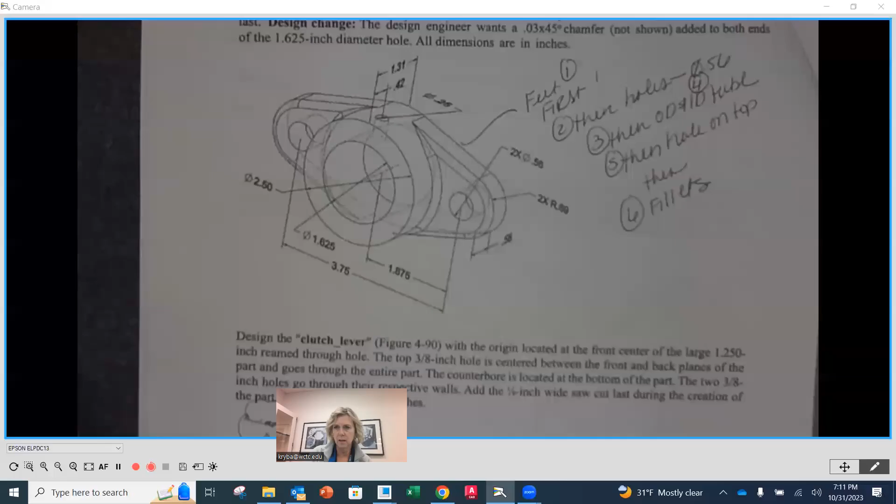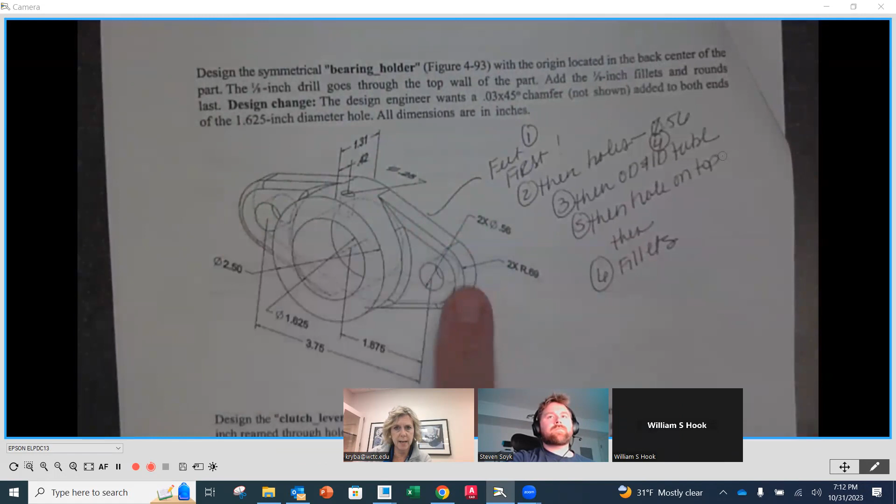Okay, we're going to be looking at creating the bearing holder. I'm going to do the demo. The order that I'm going to take this in is I'm going to create the feet or the base first as a solid. Then I'm going to create the tube added to it and then the hole going through in the middle. And then we're going to add the two holes on the side and then the fillets and then the hole on the top as well.

So if we go back to Creo and get started on a new file, I'm going to start new. Bearing underscore holder. Make sure that you set your working directory. I already did that in my background here, so make sure that you do that before we go forward.

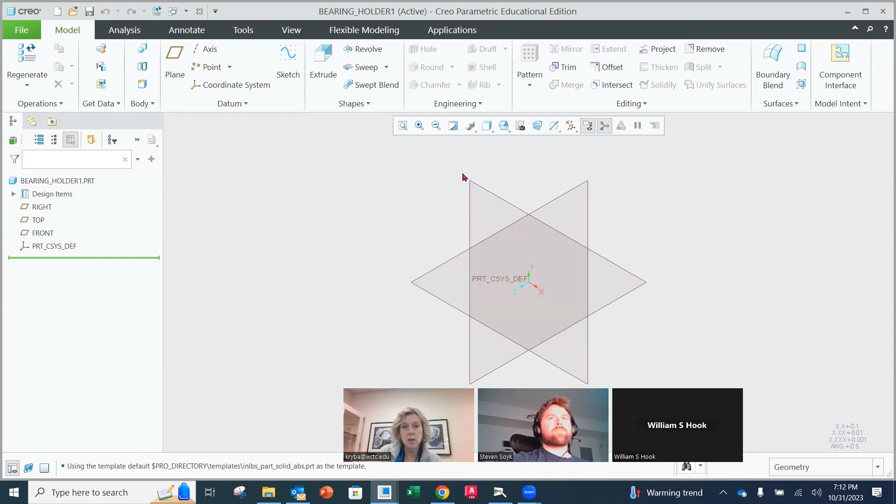Okay, and then what we're going to start by picking the plane that we want to do that first extrude on. So I'm going to do my extrude, define, and I'm going to go on my front plane here. And that's where you start most often. I mean, maybe not always, but most often we're going to start with what we anticipate to be, for instance, our front view, which we would put on our front plane.

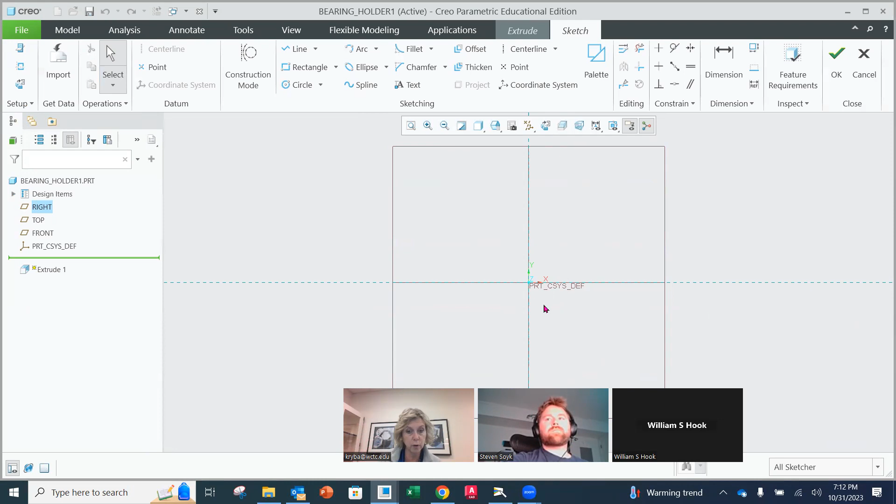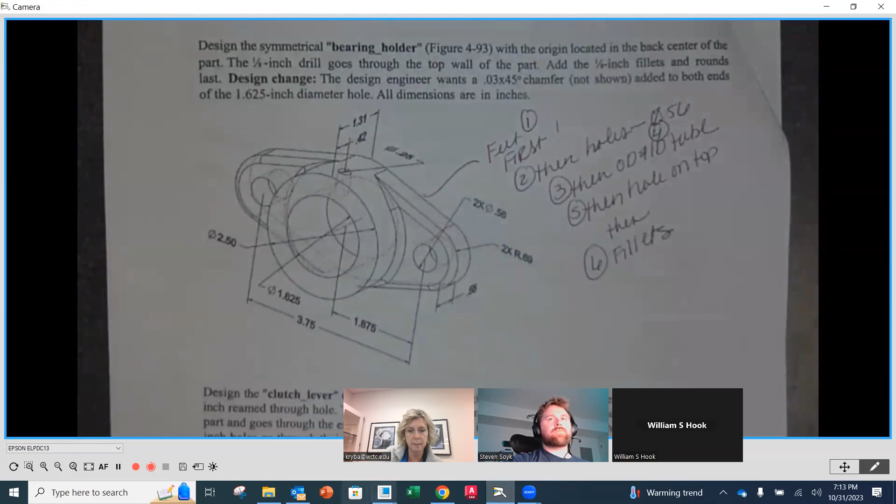So as we look back over here, we're going to create this profile in the background and then extrude it forward. So I am going to start with the circle in the middle because that's going to create those tangent parts on the top. And then I'm going to take my circles on the outsides here and then make those tangent on either side. So go back to Creo and I'm going to start with that.

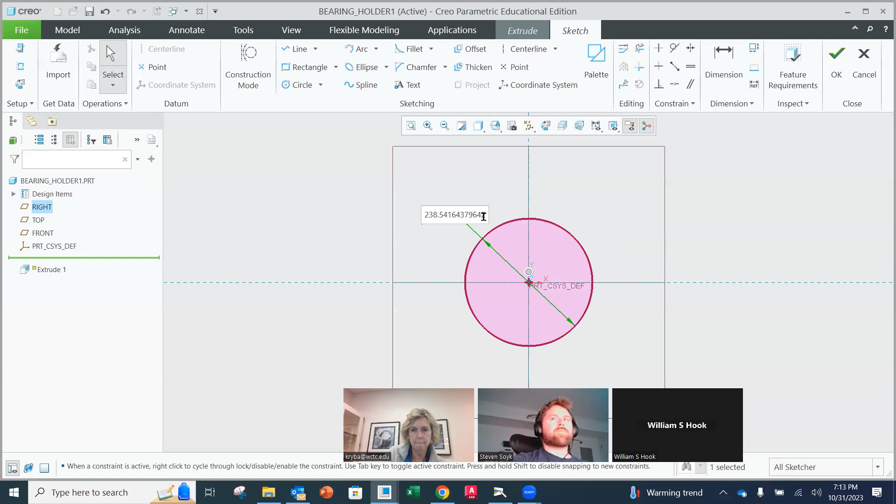Looks like it's a 2.5-inch circle for the outside of the tube there. So I'm going to put that at the origin for its center and then 2.5. My numbers lock on. 2.5 diameter. Okay.

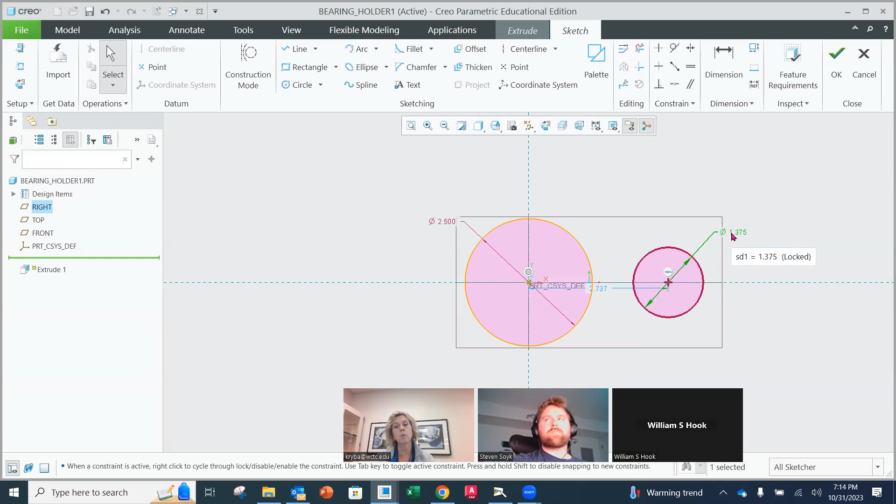And then I'm going to add the radius of 0.69 on the outside here. So I'm going to add a circle over here. And if I take 0.69 and I multiply it by 2, I'm not good at that in my head. It's 1.38. So 1.38 is probably 1 3/8. So I'm going to put it in as 1.375. Okay, these are 2-place decimals, so there's definitely rounding when it's kind of a standard inch increment, if you would. So I always kind of add that third decimal when needed, or fourth.

So that's 1.375. And then the distance from center to center here, I'm going to double click 1.875. Right. Yeah, okay. And then now I am going to make my line.

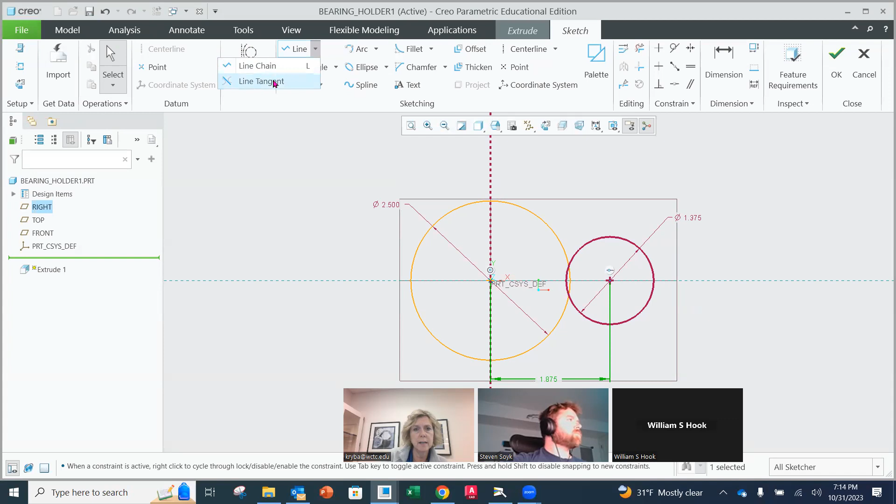Now these need to be tangent. So if we remember underneath our line, our chain line command, there's a tangent line. So I'm going to click tangent line and click again, and then it'll make my line tangent there. And then same thing on the bottom. I'm still in that command, so I can continue to do the very same thing.

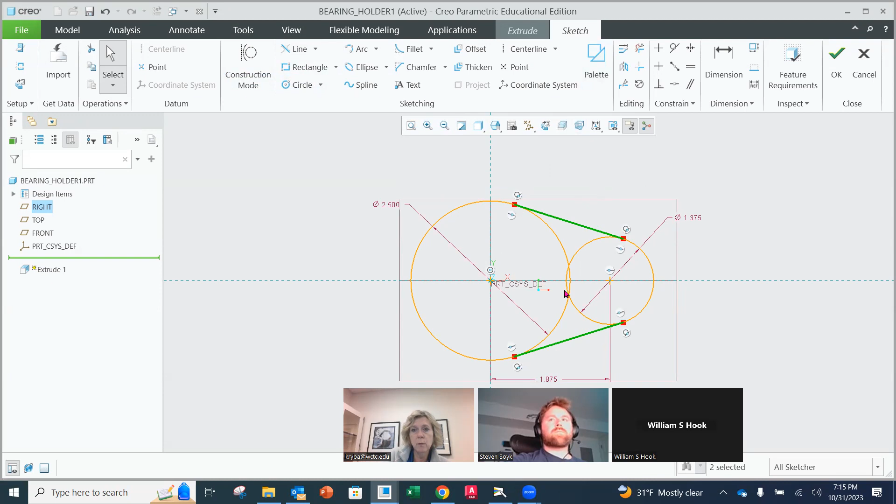Okay, and once that's in place, I'm going to trim away the parts I don't need. So I'm going to go to delete segment, kind of go like this, this, this, and that.

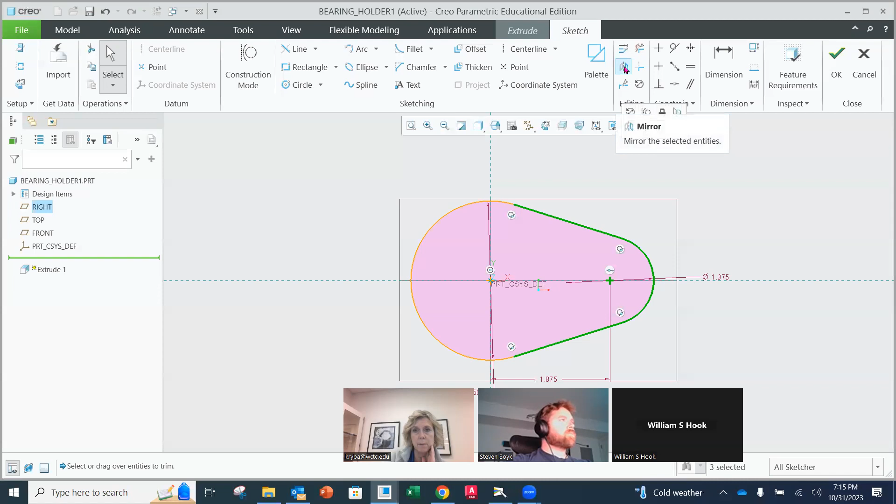Okay, now I am going to take this side over here, this right-hand side, and I'm going to mirror it on the other side before I do my extrude. So I'm going to select, make sure that you have the select arrow, I'm going to select those 3. So the tangent line, I'm going to hold my control button so I can select all 3 at once. And then I'm going to go to the mirror command. The mirror command becomes available once I have some entities selected. So I'm going to hit the mirror command. And then once that's there, I need to now select on the line that I want to mirror over. And that's going to be this one right here. Okay.

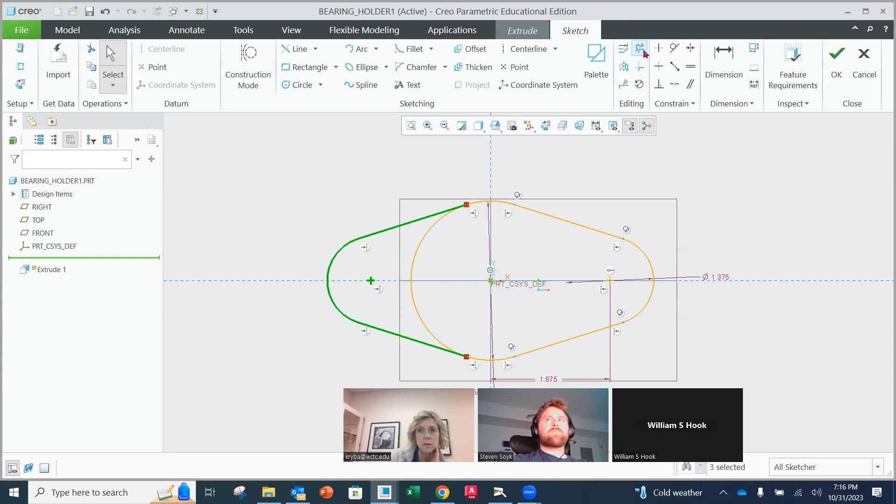All right, now I want to get rid of the section in here that I don't need. So this part of that radius I don't need anymore. So I'm going to go up to delete segment and I'm going to go over the top of those 2. And now it should fill in and be fully defined for me.

Okay, so at this point the sketch is complete. I'm going to double check my feature requirements. I'm good, and I'm ready to extrude this.

So if you're following along, do you have any questions at the moment? Make sense? Okay.

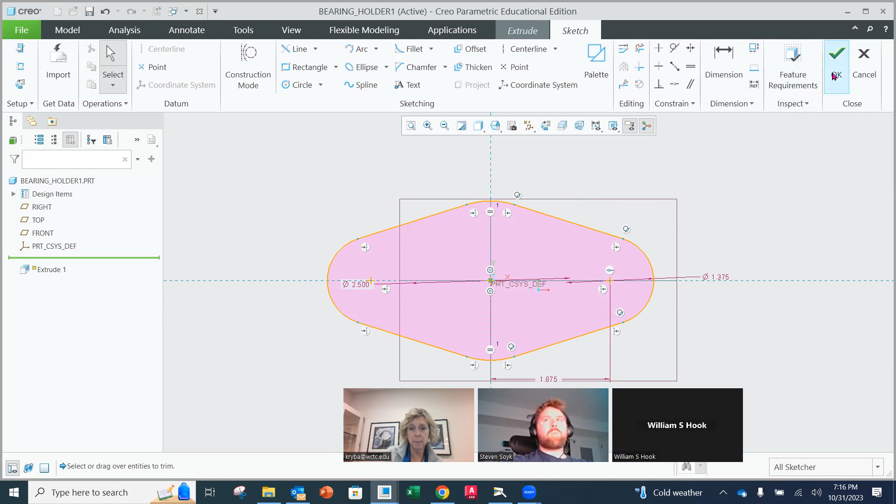So now I'm going to hit the OK button so that I can extrude this. I'm going to rotate this a little bit so I can see what's going on. And I'm going to pull that forward. As I look at this part, I don't need this to be symmetrical.

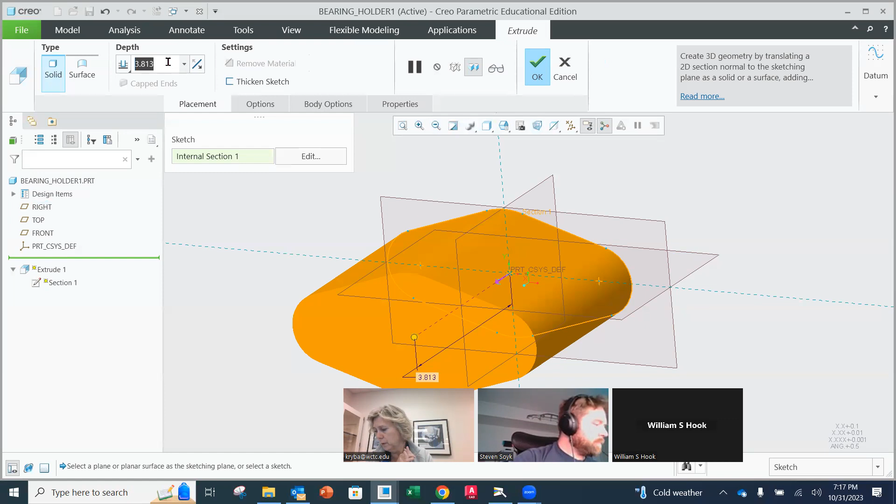So I'm going to just use a blind depth here, and that thickness of that base, or what I call the feet or the foot, is going to be 0.56. It looks like 0.56, okay. And there it is, and I can hit OK.

Now what I'm probably going to do, just because they're there, it's going to be easy to put the holes in that base. And I'm going to put those smaller holes in right here.

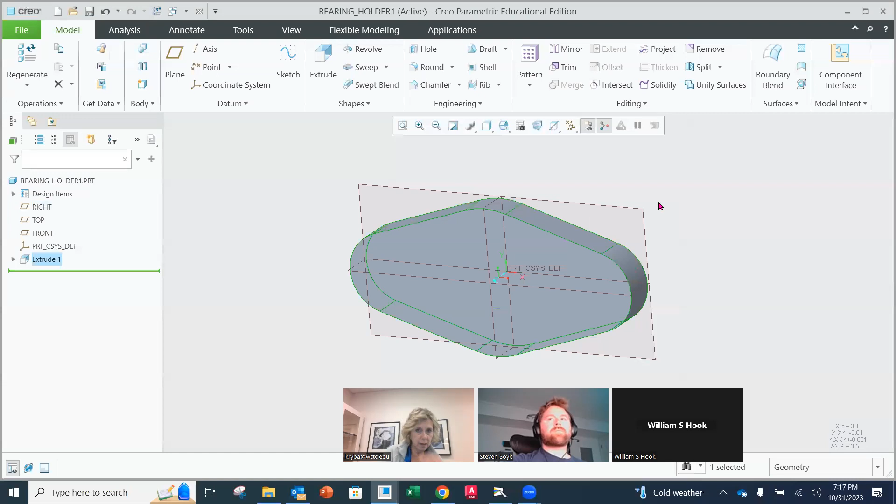So I'm going to extrude. I'm going to click on this surface. And now I'm going to put those holes to be concentric to each one of these rounded ends. So I'm going to kind of activate those ends, not clicking on them, and then click at the center here.

And then this is going to have a diameter of 0.56. There we go. And notice that it's concentric, so it shares the same center as that rounded end. So I don't have to add any more dimensions for that.

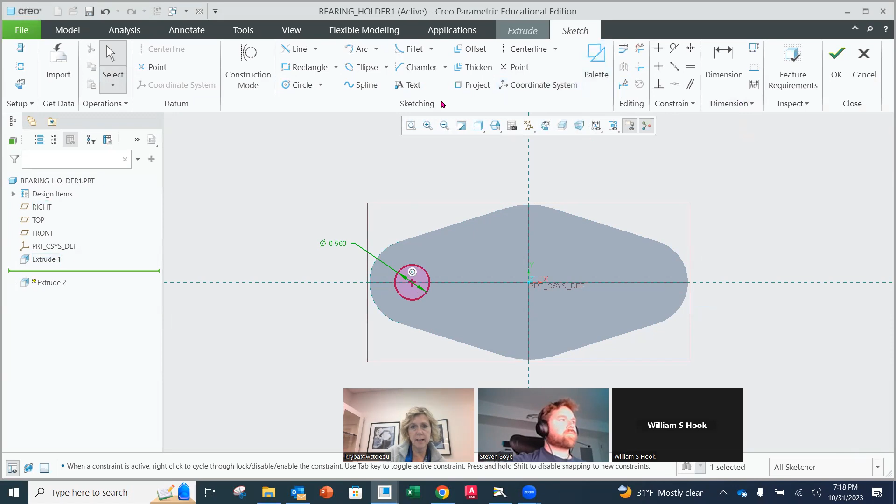I'm going to do the very same thing on the other side. I'm going to add another circle, activate that edge so I can grab that center, click on the center, and then it should activate that equal.

And we do want those two to be equal. So when we see that equal come up, we're going to hit the left mouse button, and then it'll have that same dimension as the other one.

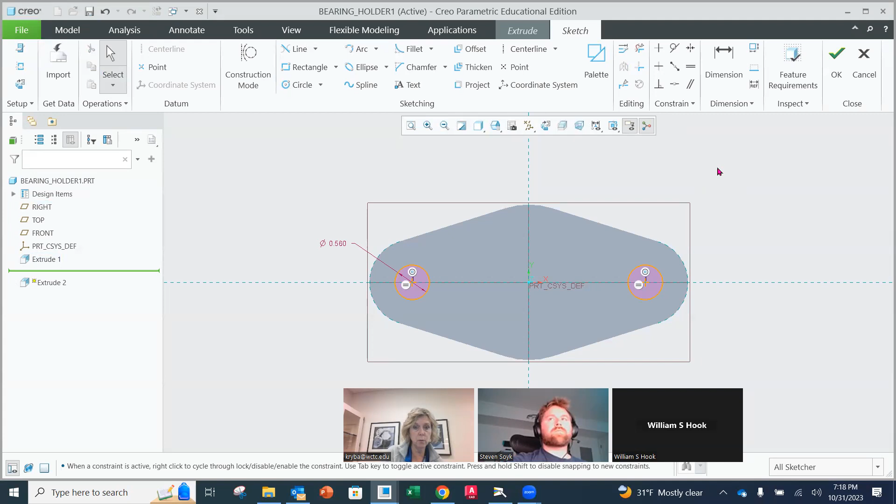Okay, no weak dimensions here. It's concentric and equal. So if I hit the feature requirements, looks like I'm ready to do my extrude cut. So I'm going to hit OK.

It's going to want to add material. We want to switch that direction, and we want to change this to through all. Okay, through all, remove material, and make sure they're in there. That looks good, and I'm going to hit OK.

Not a bad time to do a quick save. File save, and hit OK.

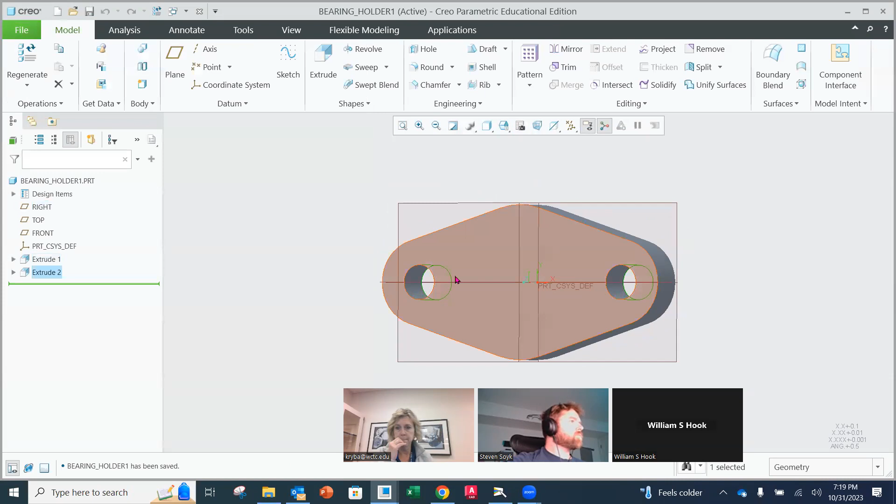All right, so now we've got our feet in there. You go back over, oopsie, wrong one. There we go. So now what I'm going to do is I'm going to add the outside cylinder here.

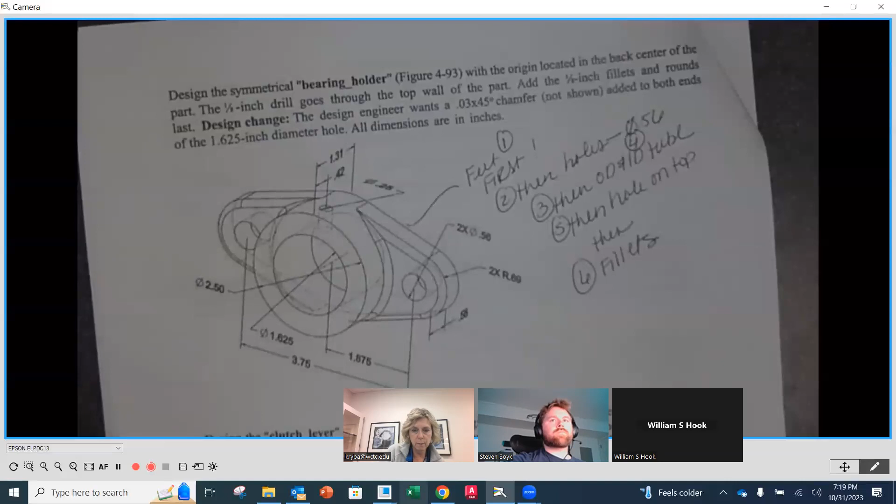Okay, so I'm going to add this as material, and then we're going to do an extrude to cut it. So I'm going to go back to Creo, and I'm going to name my two extrusions here.

So I'm going to call this the base. And then I'm going to call these mounting holes, MTG holes. Okay.

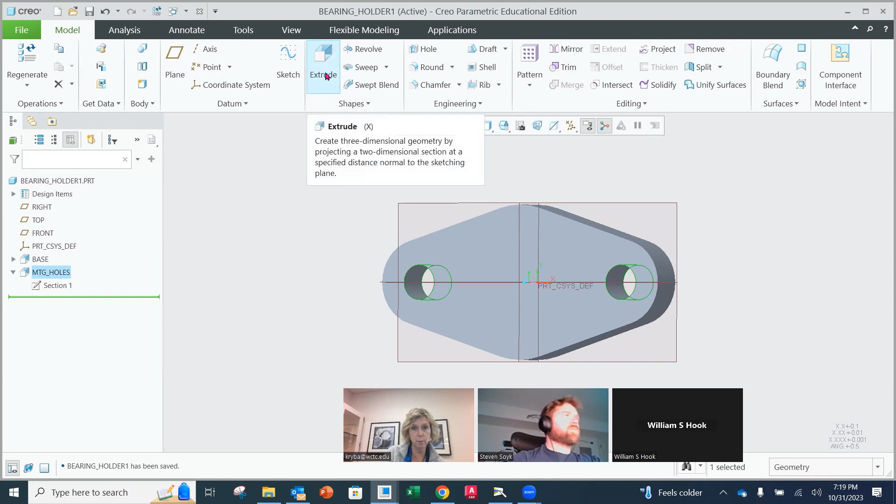And now I'm going to add a new extrude, and this is going to be the outside diameter of that tube. So I'm going to click on this surface right here, and I'm going to do a circle. It's going to be at the center of the origin, and it's going to be the very same outside diameter.

And you'll notice that it says equal, and I do want it to be equal to what that base was. So I'm just going to click there, middle mouse button, and notice I'm not going to be adding a dimension at all because I put that in at 2.5 inches. Okay, so it's the same size.

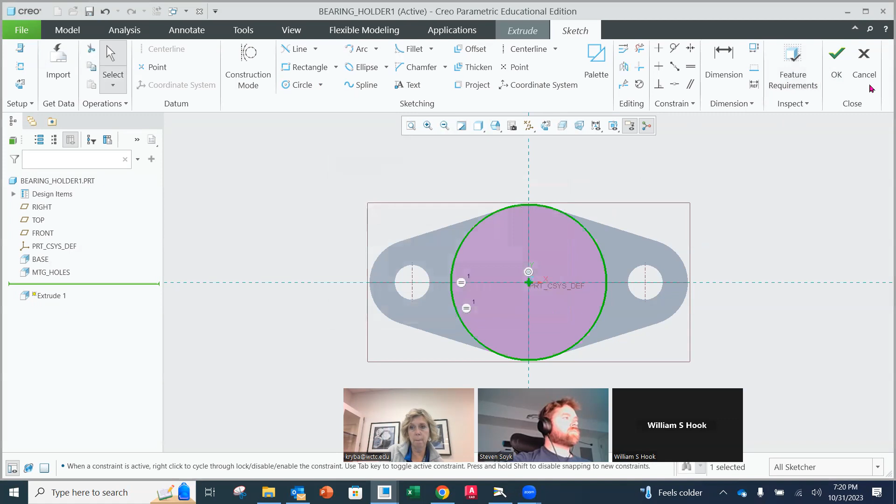So now I should be good on my requirements, and I am. And I'm going to hit OK, and it is going to project forward, and that distance.

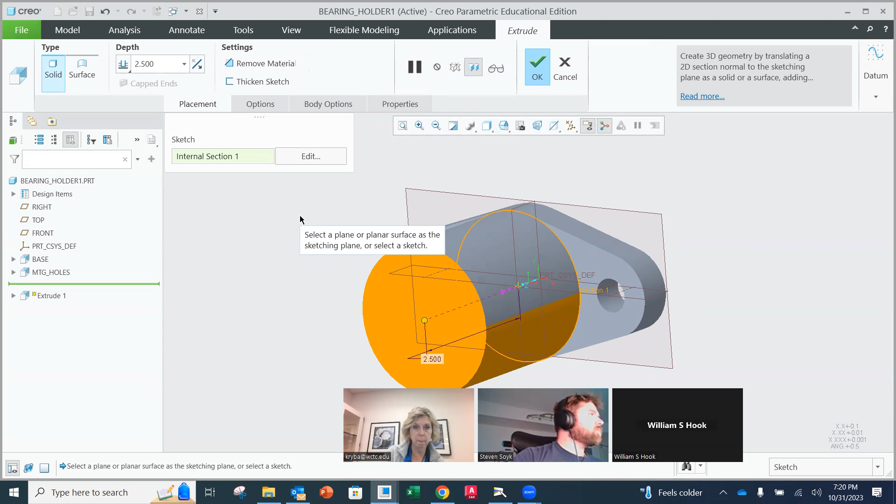Now the total distance is 1.31. So I need to take 1.31 minus 0.56. And that's 3/4 of an inch, 0.75. So my blind depth here, 0.75.

And okay, okay, all right. So now we've got this solid. So I'm going to rename. This is going to be tube OD.

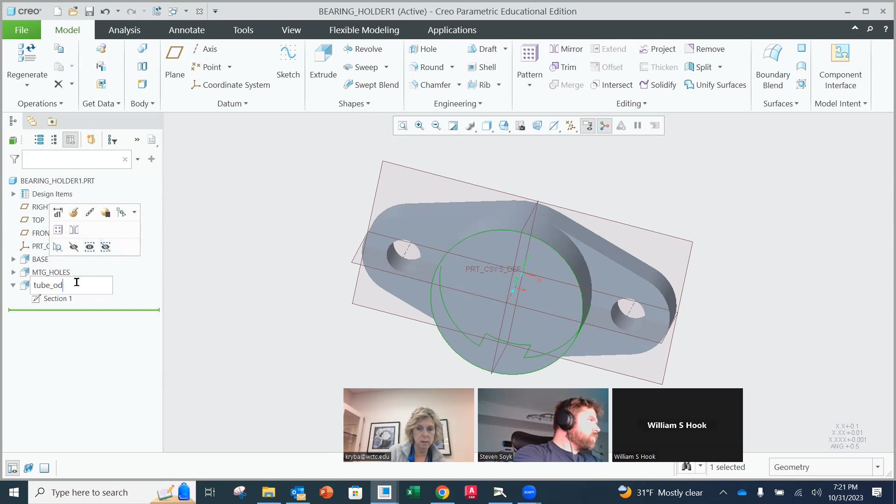All right. Now I'm ready to do my cut of a hole through the inside.

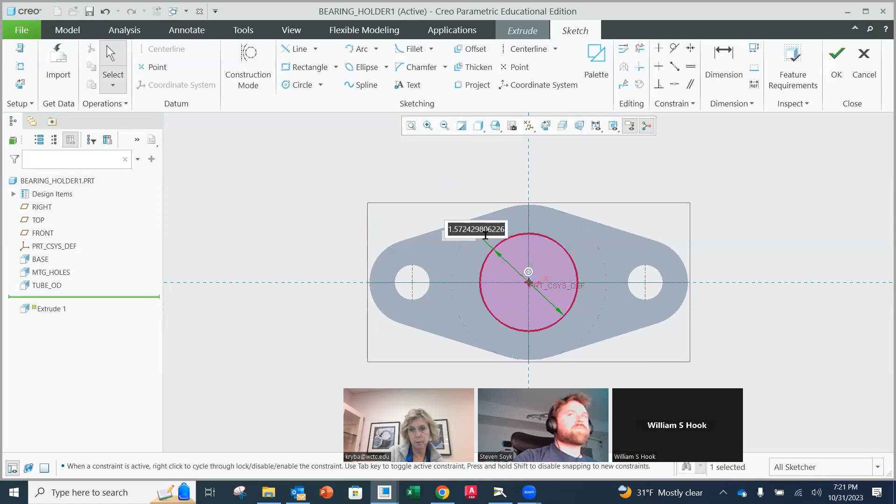So I'm going to do my extrude, clicking on this front surface here. I'm going to draw a circle sharing the same center as my origin, and make it right about there. Double click, and that's going to be 1.625. Now if I rotate this a little bit, we can see it's on the surface of that tube, which is good, that's exactly where I want it. It shares the same center, I have the diameter. Feature requirements are all set, and I'm going to hit OK.

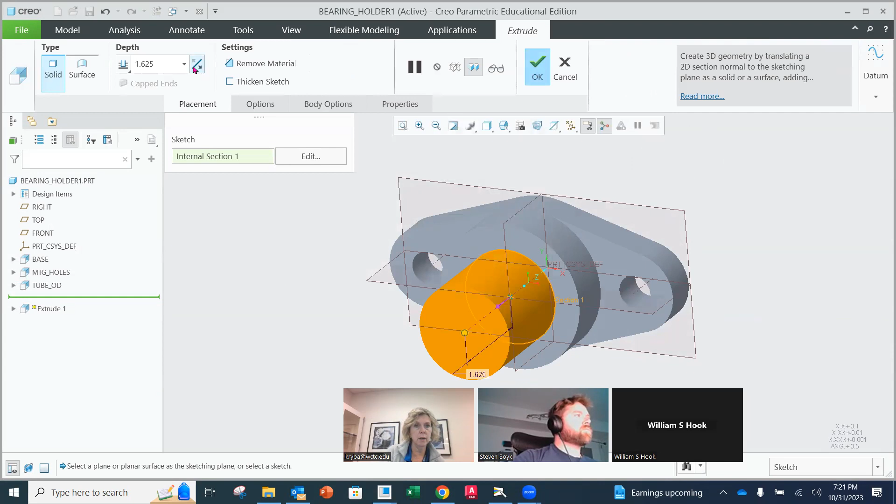We're going to switch that direction, and we're going to do a through all. And hit OK. There it is.

I'm going to change my view here to be shaded with edges, just so I can see those edges so they don't blend. Any questions so far?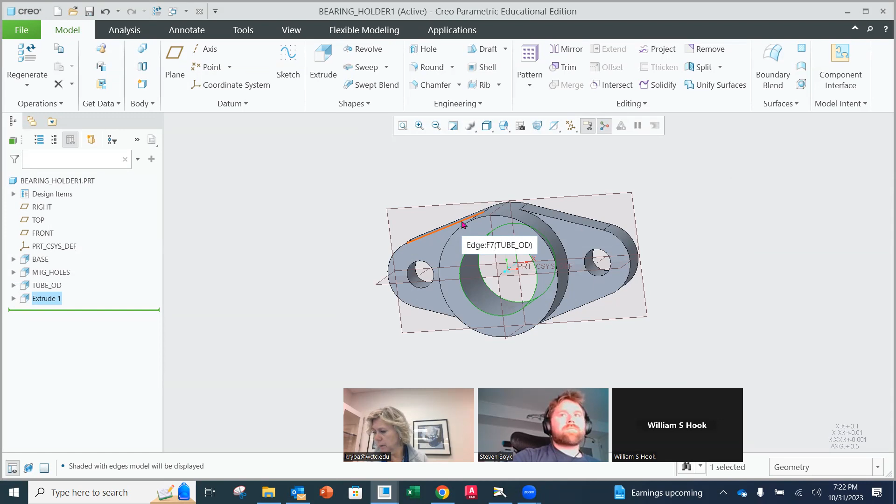All right, so now we just got the last couple features. So we'll put the hole in the top. If you look here, you'll notice this is just going through this portion right here. Now if I try to select the top of the part, it's rounded, and it won't let me select that because it's not like a plane that I can draw on.

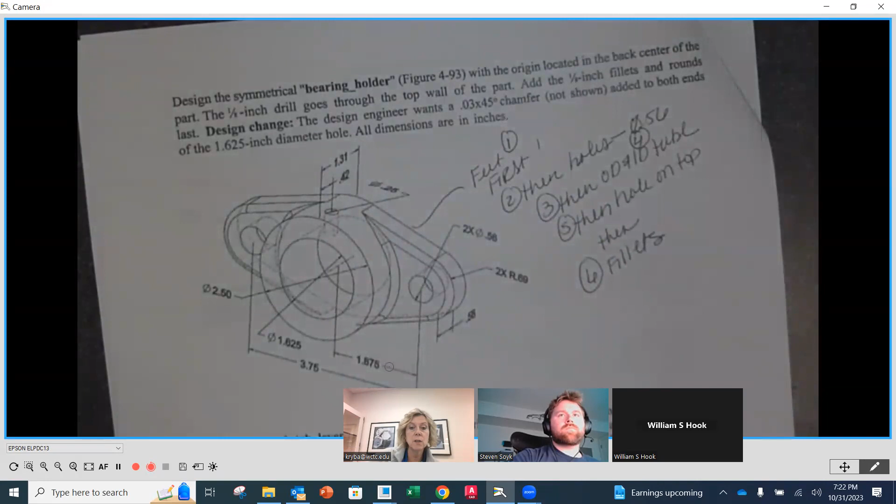So what I am going to do is use the plane going through the middle here, the top plane. I'm actually going to draw my sketch here, and we're going to project that hole going up to the top surface. Does that make sense?

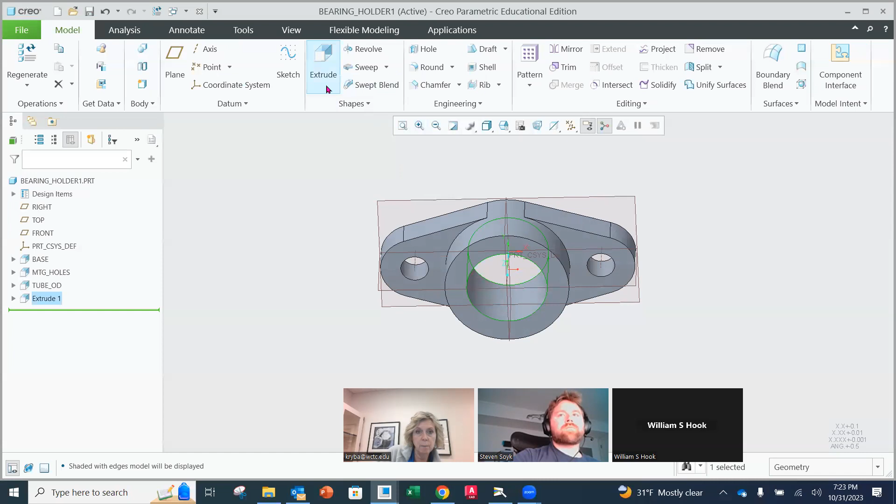Okay, so I'll kind of show you. We go back over here, we'll try. I'm going to extrude. And if I try to define and try to grab, notice I can't grab that surface on the top to try to put a hole in there. Do you know what I mean?

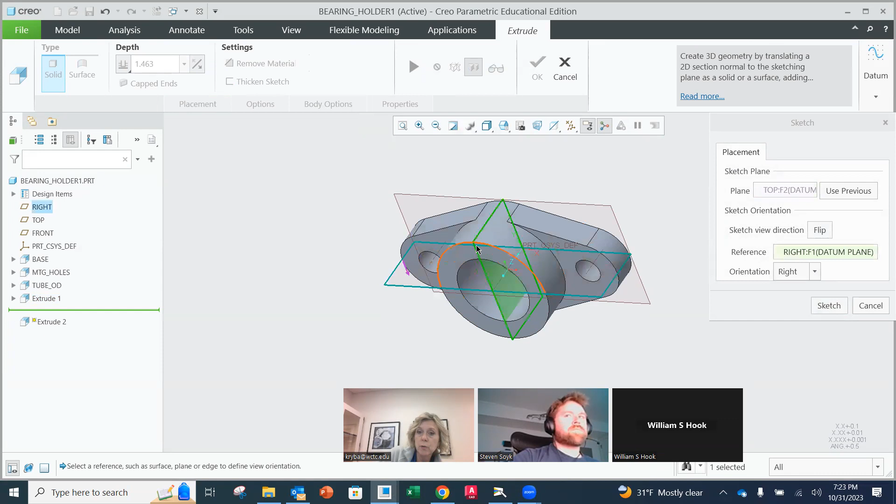Mm-hmm. So what I need to do is actually draw my sketch on my top plane, and I only want it to go through that top wall. I'm just going to hit sketch on my top plane. But the direction that I extrude it will rotate. We'll see what we can set it to only go in one direction, as we know.

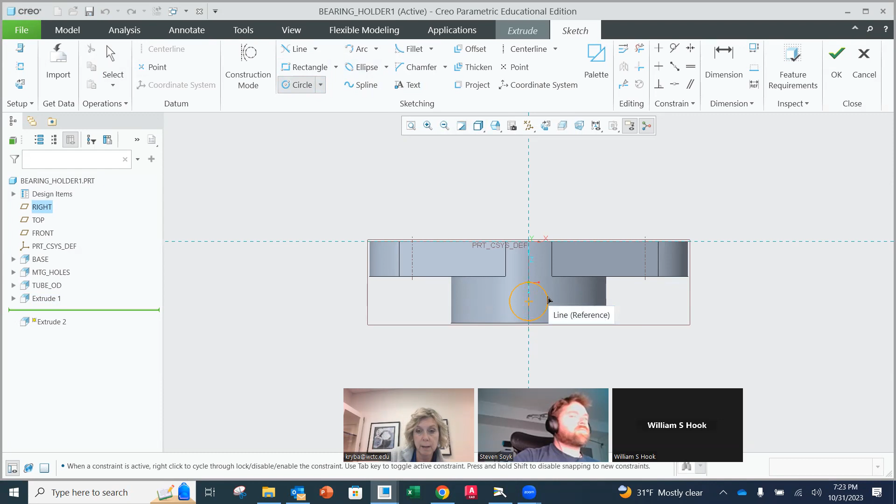So I'm going to create my circle, and it's going to be right about here-ish on that middle, which would be the right plane. My diameter is going to be 0.25. And then distance from the front, so I have to add a dimension. Distance from the front is going to be from here to the center out here, and that's going to be 0.42.

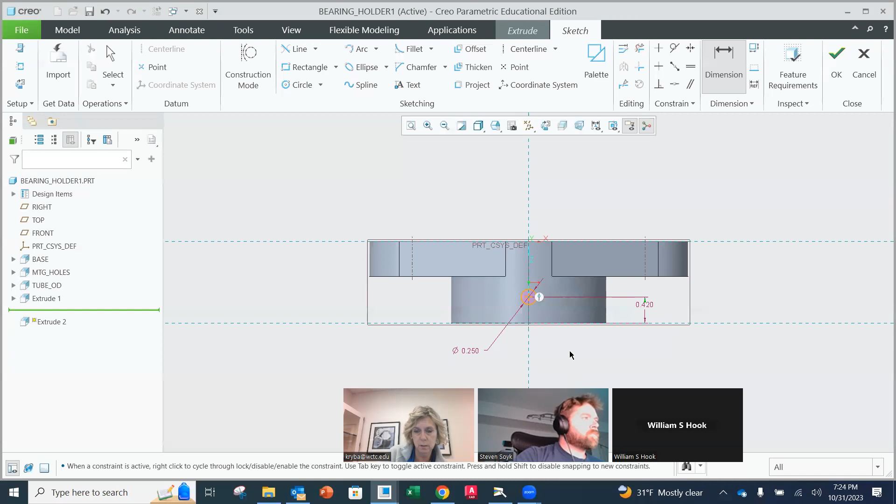And so it's on this plane right here, so it's coincident with that, so that's on center. Now if I rotate this a little bit, notice that my sketch is on the top plane, but we're going to project it up through just this wall. So if I hit my feature requirements, I'm good, and then I'm going to hit OK.

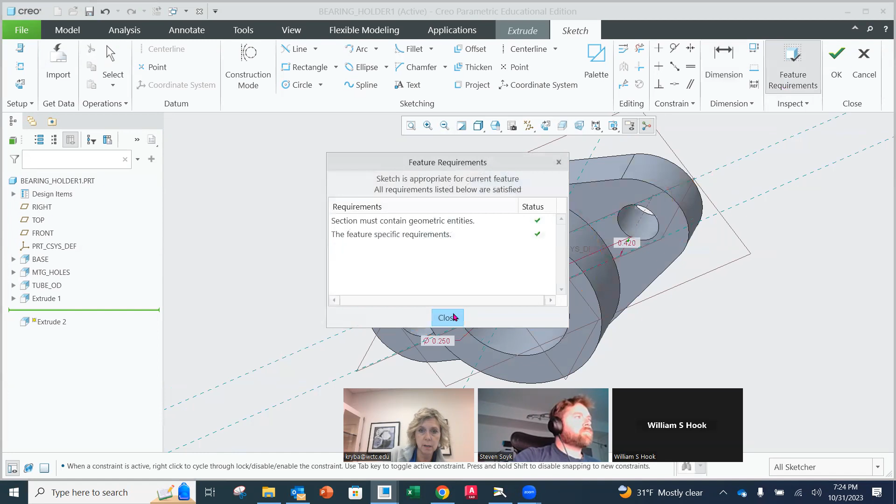And now it's going to be remove material, but I want it to go through all in that direction. Notice that it's only going through the one, it's not going through the bottom, it's only going through the one.

Now if I wanted to go through both, I could do symmetrical, for instance. I could do symmetrical, and then I would set the entire depth. So then I could set, if that's outside 2.5, I would probably do like 3 inches. Then I could go in both directions. But I don't want it to do that.

So I'm going to go to the blind depth, and I want to set it so that it only goes through the top, and it is. I want it to be through all in that direction, so it always goes through.

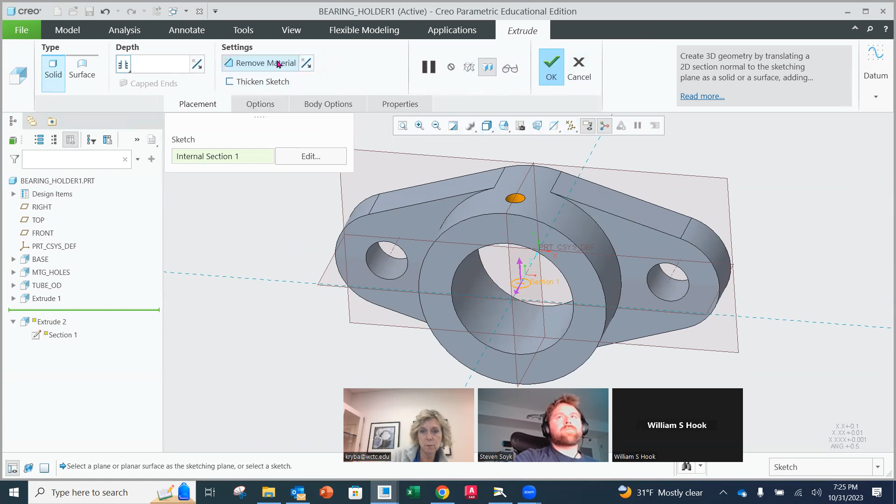Any questions? Make sure remove material is there. Okay, so that's going to be that feature.

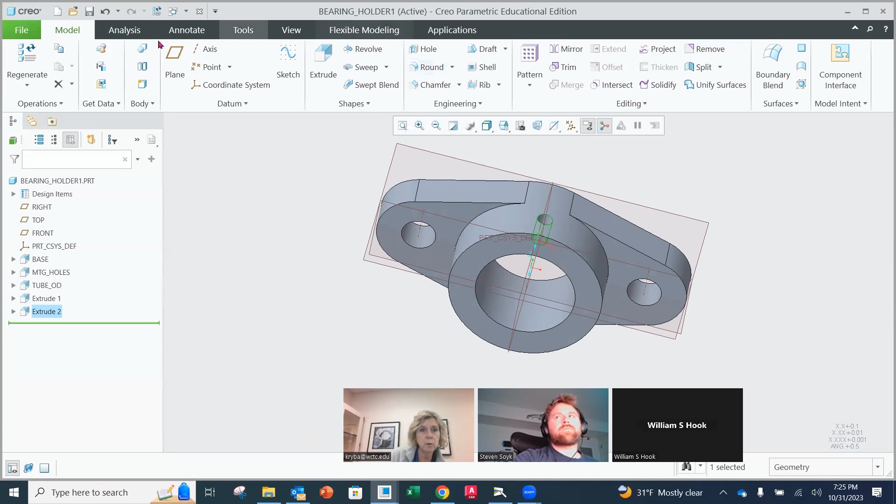And then we have the fillets, or the rounds, to put on. At this point there is a feature called round. Now, I know in Sketch we called it fillet, but at the feature level, since this is on the model tree or the model ribbon, this is a feature. So we're going to use the round command, and this whole window comes up.

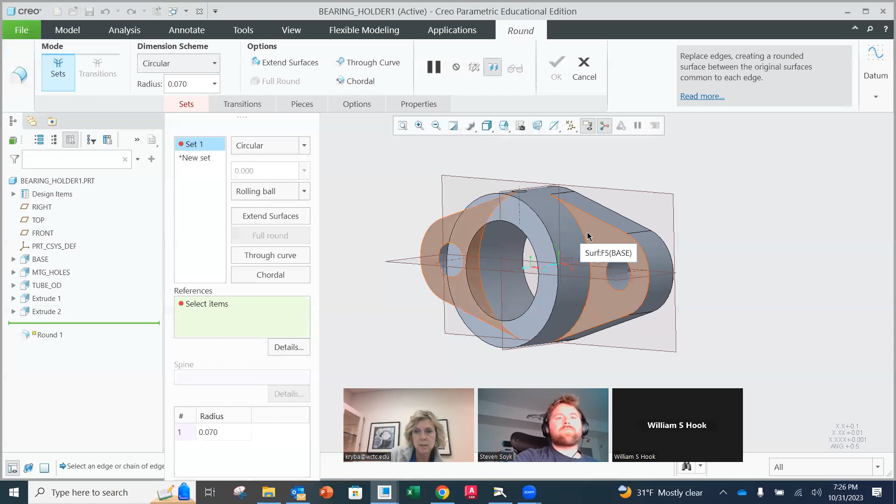It's wanting us to select where we want these fillets to go. The important thing is not to select a surface—you have to select the edge where we want it to go in. So for instance, I'm going to zoom in here, and you see how when I'm just over the edge there, it's just the edge. But if I go on either side, these are the surfaces. So I want to click only when it gets on the edge part.

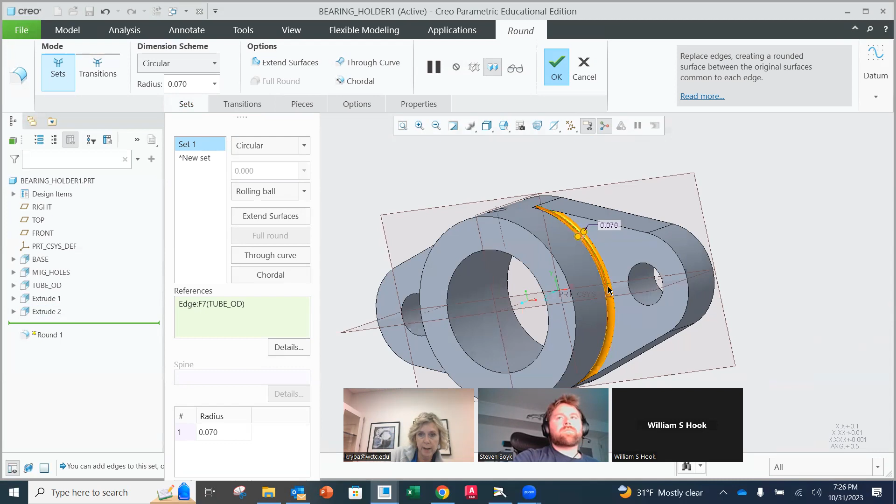So I'm going to click on this edge right here. What it's going to do is assume and go continuous until it hits an abrupt change, if you would. And you'll notice that it assumed a radius of 0.070.

We could either change it here in the model, or down here on the table. I'm going to set that to an eighth of an inch fillet—is that right? Eighth of an inch fillets. It's up in the description, 0.125.

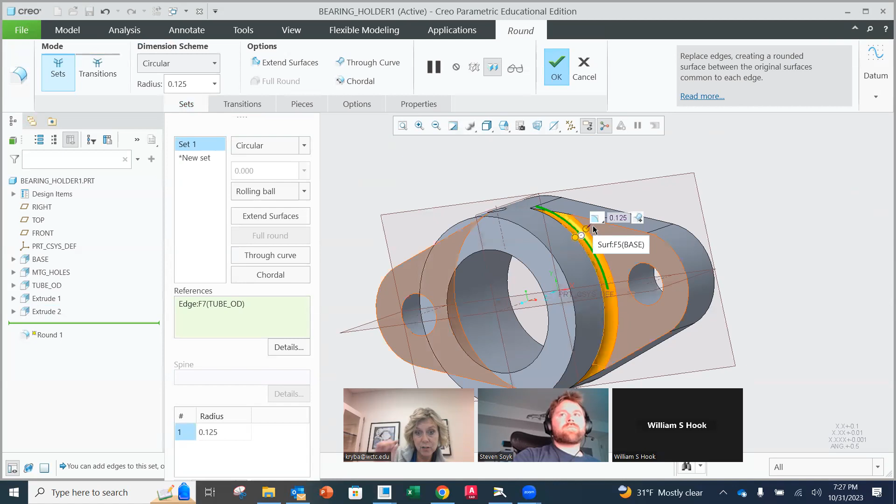Okay, so that's there. And now, instead of going out of here, I can continue hitting edges. So I'm going to zoom in here and wait till I get to just this edge right here, and then it's going to go around the whole thing—it'll kind of see where it's continuous.

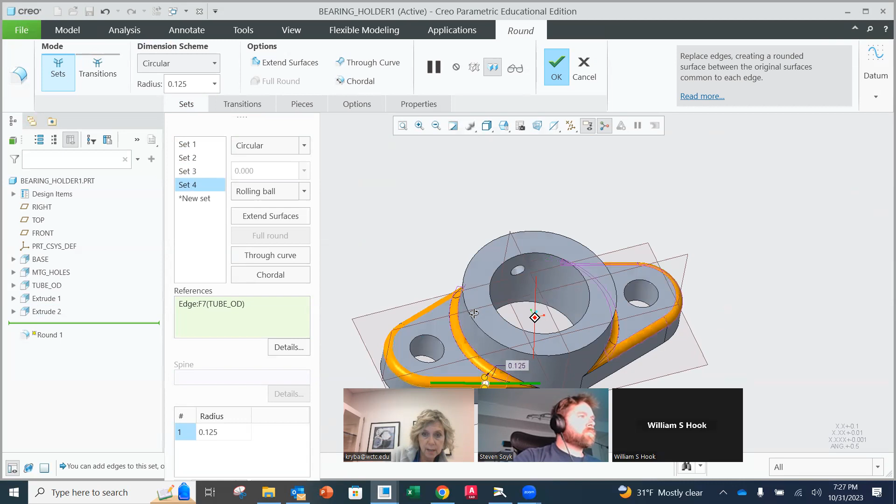And then I'm going to go on the other side, because these are all the same sizes. I'm going to do that very same thing here—grab the edge and the edge, and I believe those are the only ones I need to do on that top edge. Yeah, okay.

And once I have those identified, I can hit the green check mark and they're in. Okay, now I probably should go back and...

I'm going to rename this as tube underscore ID, inside dimension or inside diameter. And then this is going to be the top hole. And then the round is the 1/4 inch, or 1/8 inch, radiuses.

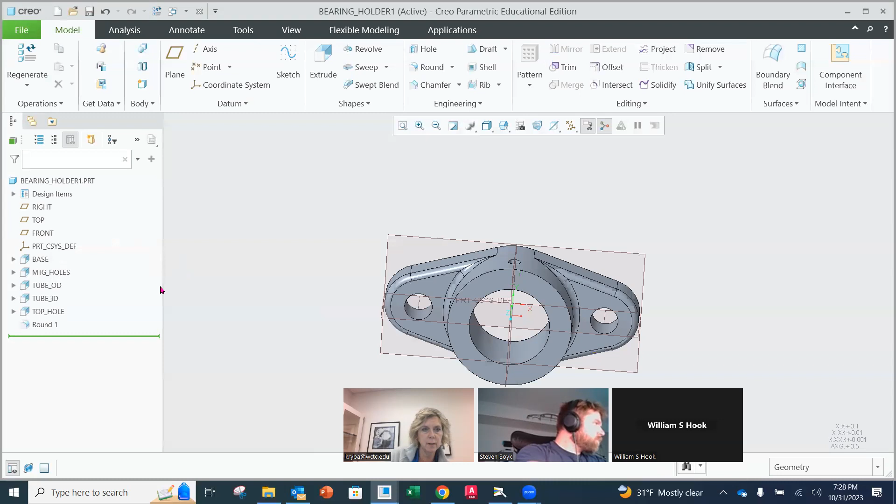I wonder if I can rename that—0.13 or 0.125 underscore fillets. No, it doesn't want to. I don't know if I can rename those or not. Oh, I probably know why—probably because I had a decimal started. So I'm going to maybe put fillets underscore 0.125. Maybe it'll... it didn't take that either. Oh, Creo—love, hate.

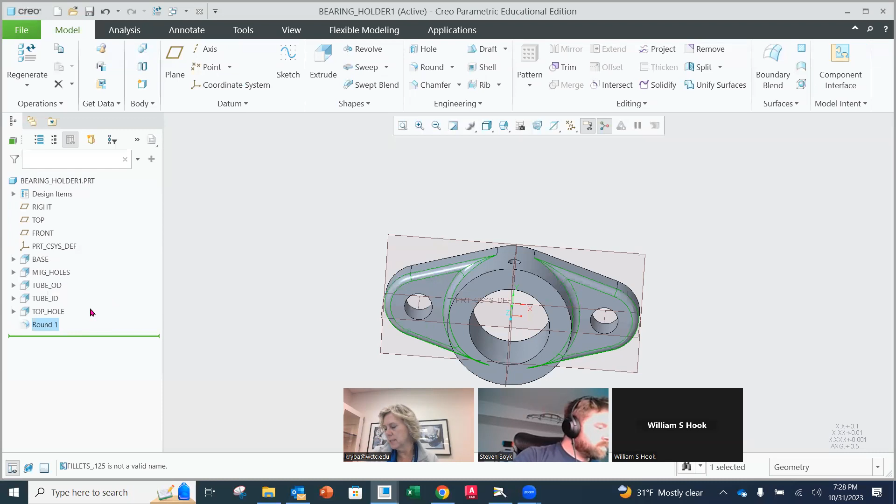I think that's it. Oh, and then we also want to add the chamfers, right? As a design change, they want us to add chamfers on the front and back side of this inside diameter of 1.625. So let's add those.

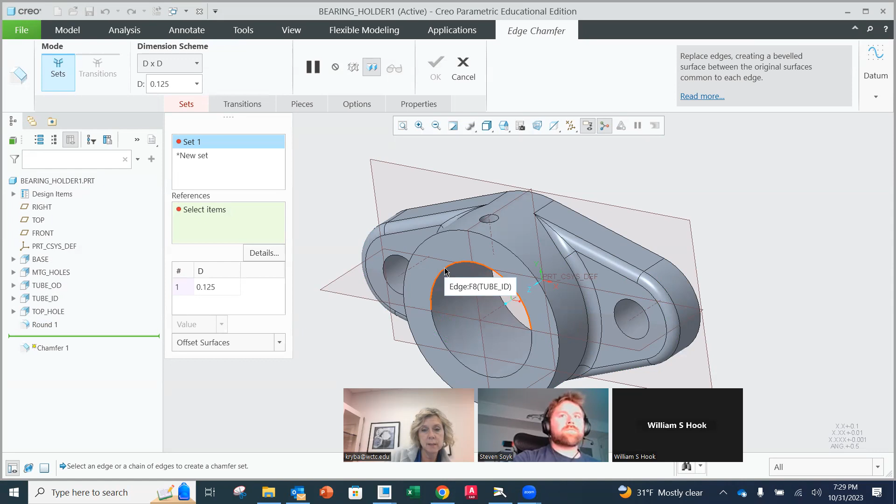You'll notice right underneath round on the model ribbon, we have chamfer. So we can click on chamfer and do that very same thing—click where we see, and select only the edge, don't select surfaces. So we're going to select the edge, and it's going to make some assumptions for us.

So it looks like we want a thirty-second by 45 degrees. So a thirty-second is, instead of 0.125, we want to go 0.0325, right? So a nice teeny tiny little chamfer on that side.

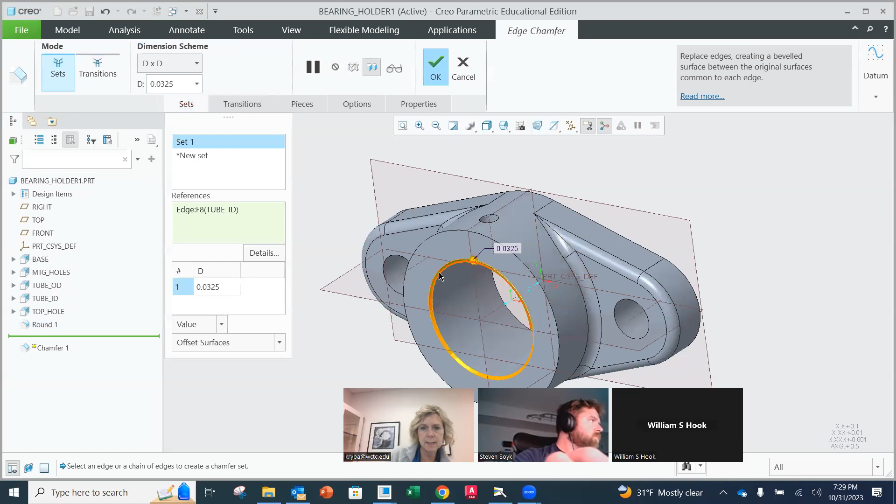And then we're going to flip it around and do the very same thing on this edge, and it'll do that same chamfer on both sides. Then we can hit OK. And there we go—looks good.

Is that helpful? Yeah, yeah, that helped out a lot. Thank you. What was that? I said that helped out a lot. Thank you. Good, you're welcome.

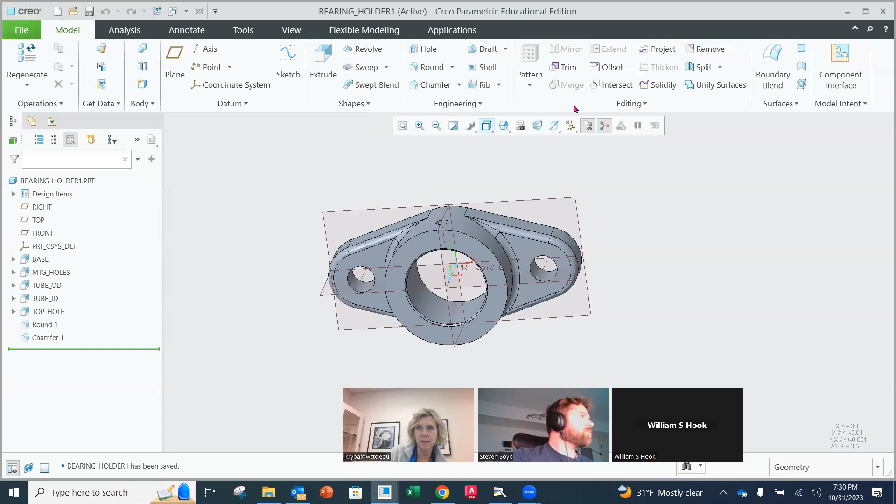You're welcome. All right, so we'll give this one a save. And I think that's it. I'll stop recording.